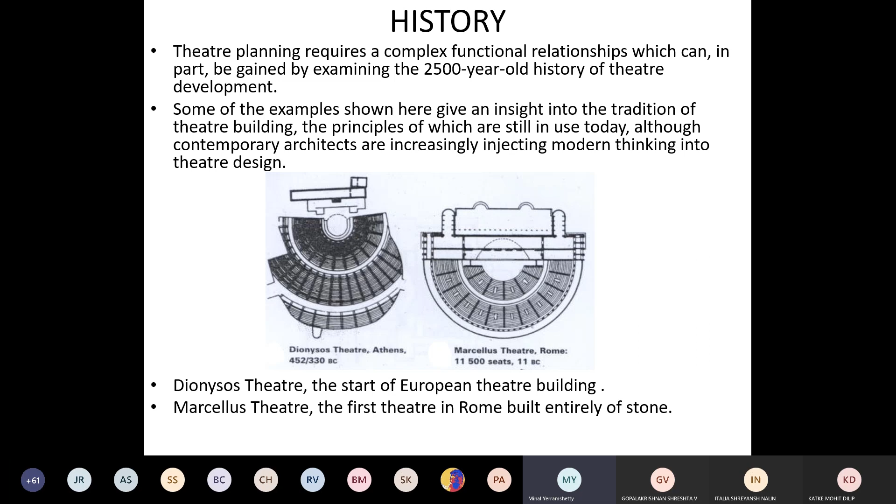So some of the things I will be telling you today are examples of what they had in the olden times, and how increasingly contemporary architects are injecting modern thinking into theater design. Okay, next. Can you see the next slide? So the real theater, like the opera and the going-to-the-theater kind of movement, started in Italy during the 16th century.

Obviously Renaissance. The Renaissance saw a lot of these kinds of movements because it was a thinking era, or the Enlightenment era, and it was during this time that huge structures involving massive institutionalization came up. A lot of these structures started coming up because they needed them to have those kinds of discussions. So you will see major schools, major art schools, major health centers coming up, adopting that technology at that point of time.

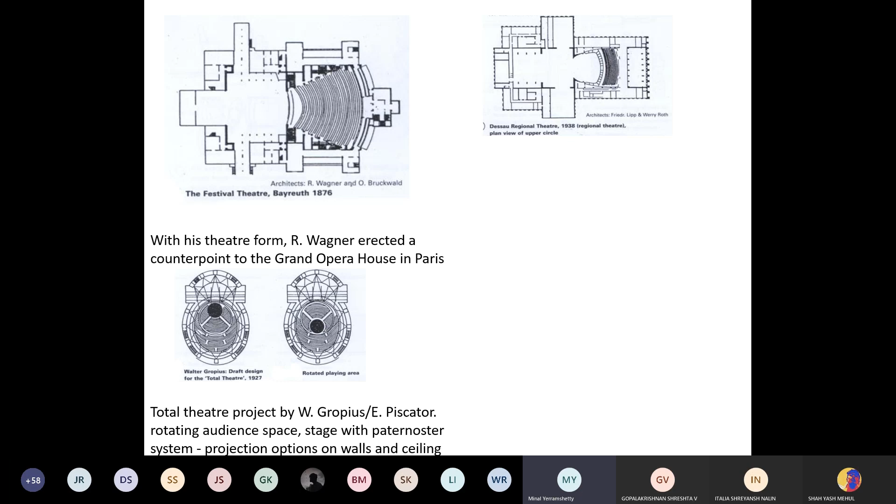Ek second, huh? Somebody is asking me to, 1 minute. Click on to presenter. Where is the presenter? Stop presenting, and I cannot see the slides. 1 second, guys. Turn on, stop recording.

Yes, Tagore Memorial Theatre. Thanks, Sayukta. Can you hear me, Sayukta? Yes, thank God. Okay, so Sayukta answered my question. I forgot the name. It is Tagore Memorial Theatre, designed by Doshi in Ahmedabad. And you can see it on Google as well if you don't have time to go to Ahmedabad. Obviously not possible in today's day and time.

Have you been to Ahmedabad, by the way? Second years in section. No. Best opportunity. You guys should have. But तो क्या करेगा तुम लोग का पूरा vacation? I don't blame you guys.

So you should see that, and you will understand what I'm trying to say. What you see outside is very different from what you see inside.

Rishiraj, where is presenter? I don't see that. Show device, I'm not able to get that. Hide conversation, raise your hand, keypad. No, I'm not able to do that. ठीक है, चलेगा. No problem. I know what my slides are. Okay, we were on this slide. Meenal, your slideshow isn't visible now. It's showing can't display content. But is everybody seeing this? Yes, we can see the screen. I think because of the internet issues, the slides go off sometimes.

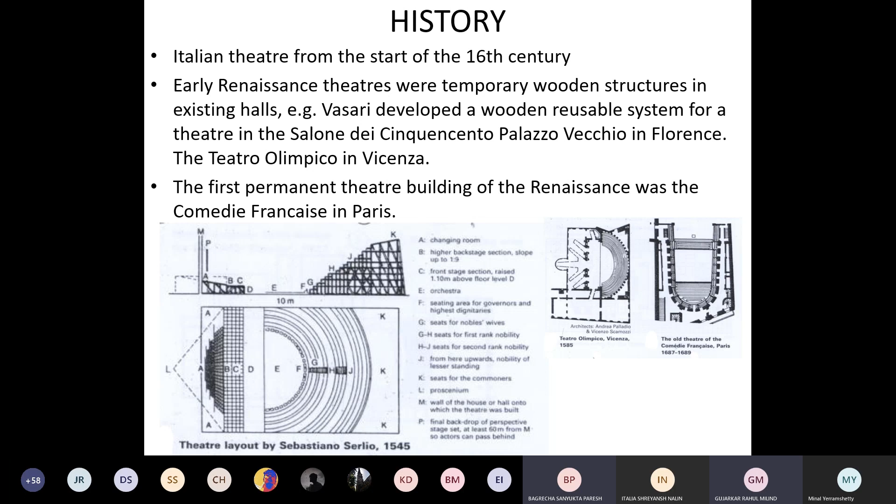So can I go ahead? Can you guys open and see it? Okay. Now people are saying they're able to see it. Rohit, can you see? Zoya is able to see. Who else is not able to see? Please, can you chat? We can see now. Great, all of you can see. So there must be some problem with the internet, guys, because here everything is fine. What can I do if you can't see, or you tell me what to do because I don't know.

Did you guys attend that Microsoft Teams meeting? Hello. Yeah, I didn't. Yeah, we did. I missed. I had some personal issues, so I couldn't come.

Anyway, so coming back, can you see now the auditorium study? These are some of the things to study. Imagine that you have already got a congregation space to design for your studio, and you have some 300 people coming there, plus some auxiliary spaces around. So around 500 people are going to be on your site at a given point of time. In such a scenario, wouldn't your 500 people create a problem for your surroundings? Am I right or wrong?

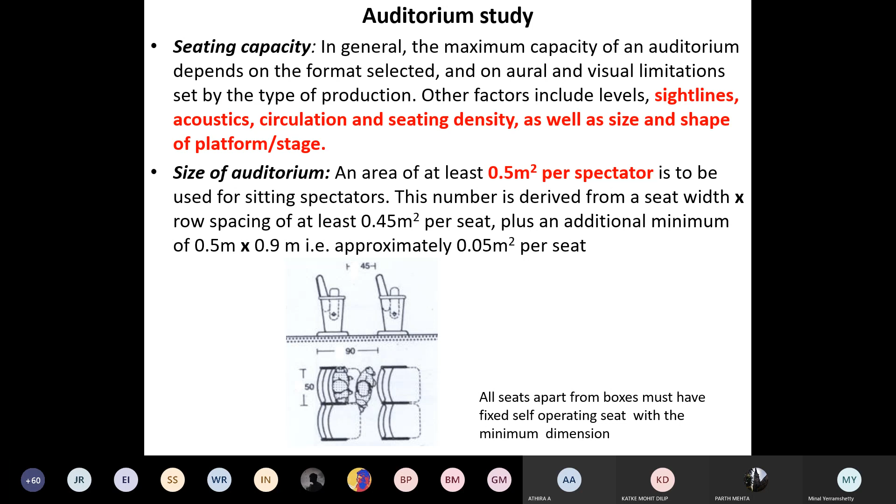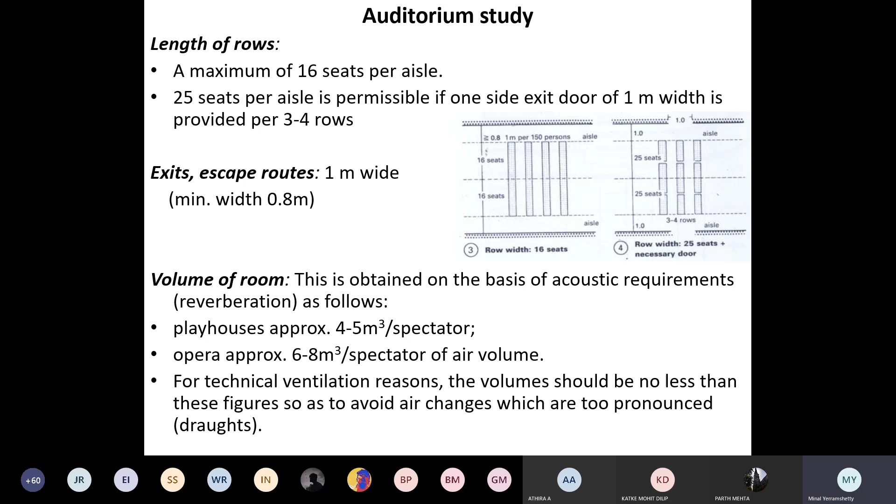Yeah. So you can read for yourself that for opera houses it's different. For technical ventilation reasons, the volume should be no less than these figures. Another technical reason is I need that kind of air change volumes. Okay, and that's another reason why these volumes are required. So that's another point that you need to take care of.

And when I talk about volumes, obviously ventilation is a big problem. Air conditioning will be a big problem. Changing of lights at that level is going to be a big problem. So yes, guys, an auditorium requires consultants. It requires heavy duty planning, and it requires a lot of attention to details.

Coming to the proportions of the auditorium, how do you actually plan it? Do you see the plan? Don't get worried about looking at that small plan. I have done an animated plan after this, but just read through this. So how do I get this shape? These are obtained from the spectator's psychological perception and viewing angle, as well as the requirement for a good view

from all seats. The first sign to say that this is a damn good auditorium is that all seats have a clear view of the stage. If even one seat is saying that I'm not able to get a good view of the stage, you have not designed your auditorium well. So everything is dependent on your sight lines.

Good view without head movement, but slight eye movement, should be about 30 degrees. So from where the last row guy is sitting, तुम्हारा last person जो बैठा है center में, उससे अगर आपने 30 degree के angle में, and if you plan it parallel to that, you will get fantastic sight lines.

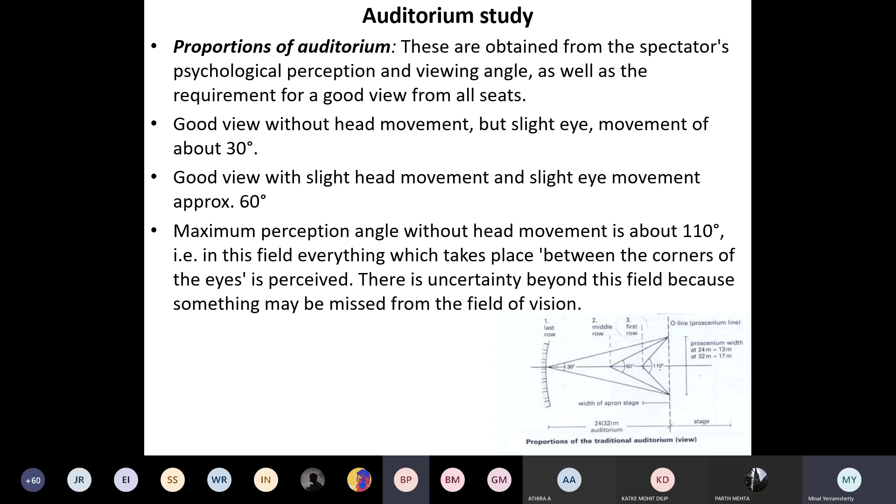Now see this bigger one. And unfortunately, I think put this on. 1 second, guys. No. Okay. Okay, great. Fine.

So I just want you guys to have a look at this. For a minute, I am silent. Please go through the slide on your own, then I will talk. आप पढ़ लो पहले क्या है ये. It's important. If you want, I'll speak.

So understand what is a proscenium. Okay. Apron, stage, auditorium. Okay.

Okay, so I'll begin. Proscenium is that line, guys, जहां से आपका पर्दा गिरता है. You know, the curtains rise. We say that in theater. Where there is a curtain line is your proscenium line. The stage which comes out of that is known as the apron stage.

Okay, and I am purely speaking from the theater point of view. ये सारी चीजें movie theater में नहीं रहती. Movie theater is actually very easy to design. There is no technology required. Sorry, I would not use that. I take back that entire sentence. But I don't really require a major level of planning as I would require it in a theater because of the backstage and all. So the proscenium is my curtain line, the stage which extends out.

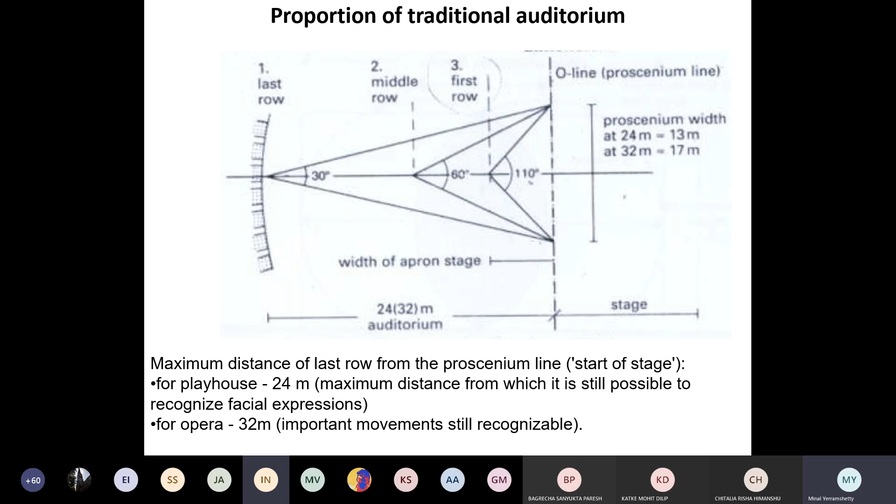Okay, another 10 more to go and I'll finish this off fast. Okay, what happened? Why is it not changing? Okay, do you see the slide? Yes. Okay, now here I will be giving you colors, this is an animation. Okay, fine. Now do you see the shaded area, the lined area? Guys, do you see the shaded area?

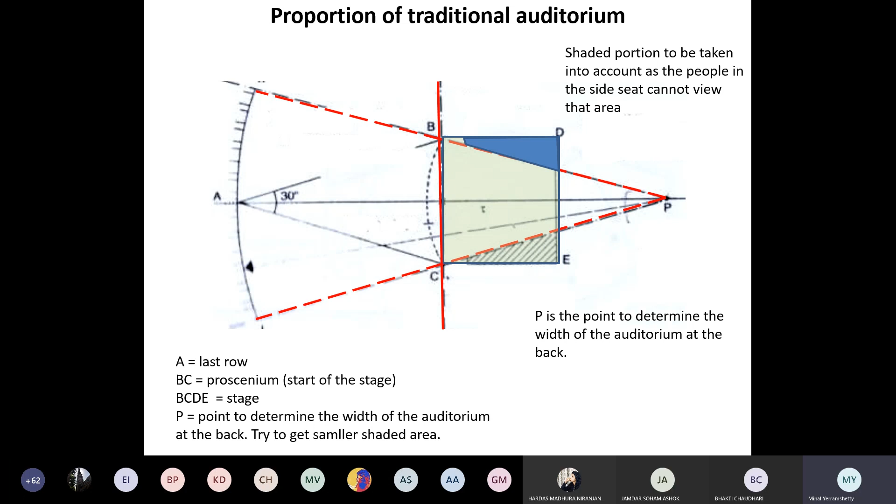Okay? Can I go next? Or do you want me to stop? Was it a bit too much? Or should I go ahead? There are 8 more slides. Do we take this next Tuesday? Okay, before we continue or stop, whatever you say.